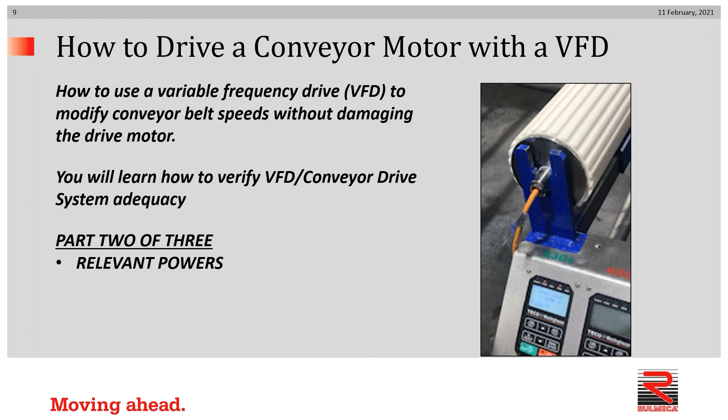Here are some facts that you should know. If an AC squirrel cage induction motor is used as a conveyor drive, be aware that it is optimized to run at a certain power supply and carry a certain full load amp rating. That will be on the data plate, FLA. It has no inherent ability to protect itself from current overload, and that's why external overcurrent protection is necessary when using three-phase motors, not only on conveyors, but in any instance.

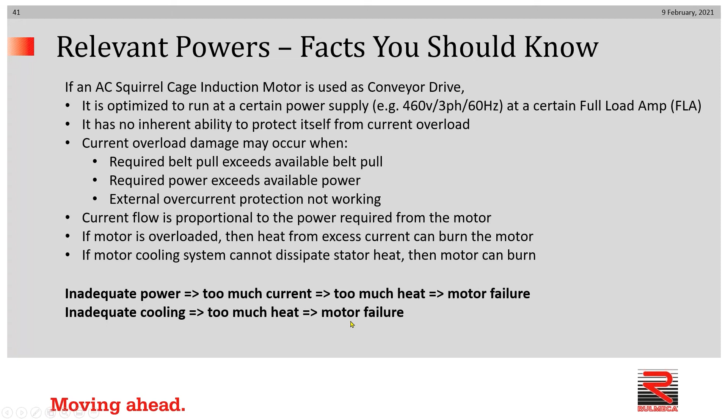Current overload damage may occur when required belt pull exceeds available belt pull, or when required power exceeds available power, and of course when external overcurrent protection is not working. The system will self-destruct. Current flow is proportional to the power required from the motor, regardless of what it's designed to provide. If it's overloaded, then heat from excess current can burn the motor, generally in the stator. If the motor cooling system cannot dissipate stator heat, that also can cause the motor to burn. So in summary, inadequate power implies too much current in the stator, which implies too much heat, which implies motor failure. Likewise, inadequate cooling would imply too much heat, and that implies motor failure. Both of these things need to be avoided.

Now let's discuss relevant powers and heat dissipation. Power is the rate of doing work, or the amount of energy transferred per unit time. Electric power is converted into mechanical power when an electric motor is used to drive a conveyor belt, and heat is a natural byproduct. Required mechanical power is generally calculated in foot-pounds per minute and expressed as so many horsepower.

A standard electric power supply is defined as the supply which is readily available and installed to power the drive system. The installed electric motor power, expressed in horsepower, is what is chosen to drive the conveyor belt. Available electric power supply may be constant if 460 volt 3-phase 60 hertz is used as supplied by the power company or by the generators on site, or it may vary. If a variety of frequencies are going to be used with a VFD, then available electrical power supply will vary. Likewise, is available electric motor power constant, or is it going to vary with various hertz?

Heat: motor stator heat must be continuously dissipated while the drive provides continuous full load mechanical power. Required steady-state cooling may use airflow, as in the example of a TEFC motor, a totally enclosed fan-cooled motor, very common, which is typical in an exposed drive system, or required steady-state cooling may use oil flow, as in the case of a Rulmeca motorized pulley. We'll see examples of an exposed drive system and an internally powered drive system in the coming slides.

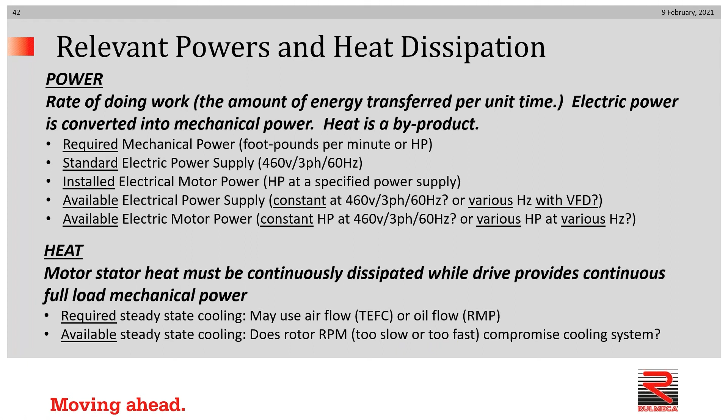Work may be defined when a constant force of magnitude F exerts itself on a point which moves a displacement of S. Work equals force times displacement, or W equals Fs. In imperial units, work is expressed in foot-pounds. If our force is 1,000 pounds, and if the point moves in a straight line a distance of 330 feet, then the work done is 1,000 pounds times 330 feet, or 330,000 foot-pounds.

Now let's define mechanical power. Power is simply the rate of doing work, or so much work per time. Mathematically, it would be expressed as follows: force times displacement divided by time, or the equation Fs divided by T. Alternatively, we can say the same thing in a different manner: power equals force times velocity, or force times S divided by T. Our example, once again: a force of 1,000 pounds exerting itself on a straight line for a displacement of S. If that takes 1 minute, then the required power will be, as you can see here, Fs divided by T, 1,000 pounds times 330 feet divided by 1 minute.

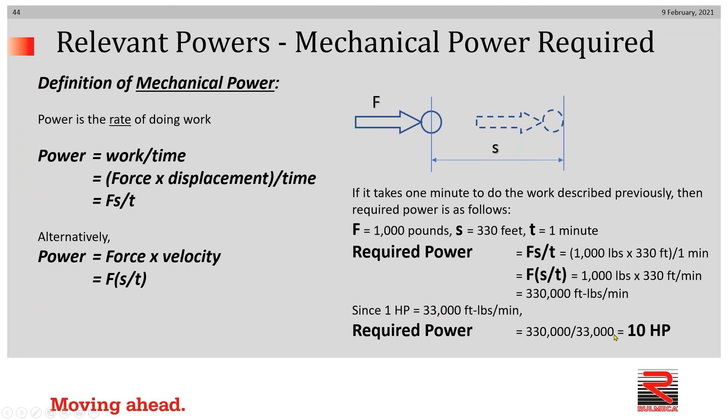Alternatively, we can say it's a force of 1,000 pounds multiplied by 330 feet per minute. Both equations give the same result, 330,000 foot-pounds per minute. Since 1 horsepower equals 33,000 foot-pounds per minute, we know that required power to do the work is 10 horsepower.

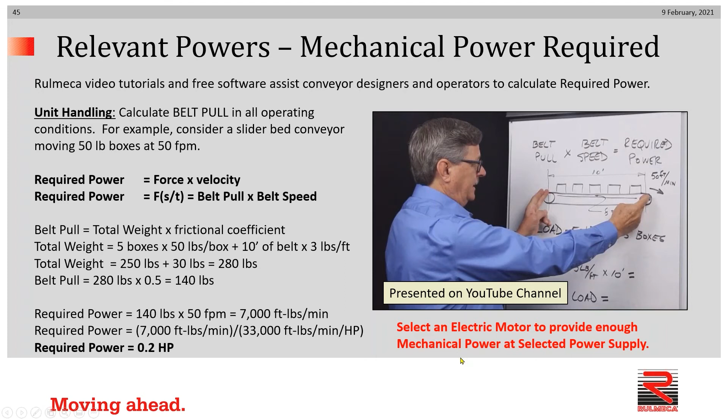Let's look at an example of a slider bed conveyor, which is horizontal, moving 50-pound boxes at 50 feet per minute. Required power equals force times velocity. If we know that the belt speed needs to be 50 feet per minute, 140 pounds times 50 feet per minute gives us 7,000 foot-pounds per minute. Dividing by 33,000, our answer comes out to be a required power of 0.2 horsepower. Now the designer can select an electric motor to provide enough mechanical power.

In bulk handling, we calculate TE, effective tension, and we need to determine the tension required to overcome friction, gravity, and momentum. As previously, we know that required power equals force times velocity, or required power equals belt pull times belt speed. Our methodology is the CEMA historical method, and you can see the equation here. We know that required power equals TE times V, or belt pull times belt speed.

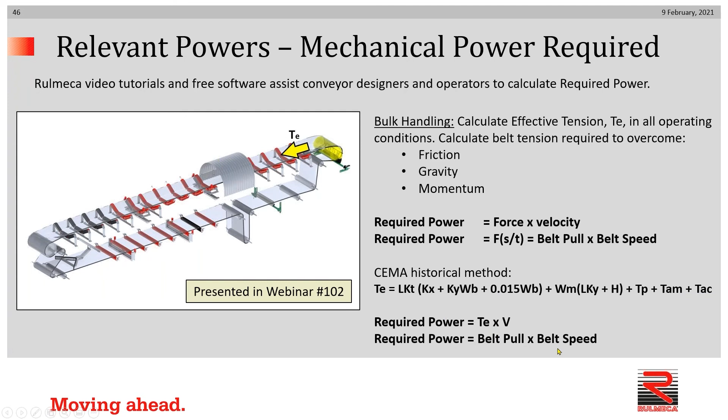Say we're going to move a certain quantity of stone at 330 feet per minute, and our calculations tell us that the belt pull, or the effective tension, is 1,000 pounds. 1,000 pounds times the selected belt speed of 330 feet per minute gives us a required power of 330,000 foot-pounds per minute. Divide by 33,000, we can see that the required power to do what I just described is 10 horsepower. Now we can select an electric motor to provide enough mechanical power at whatever power supply we choose.

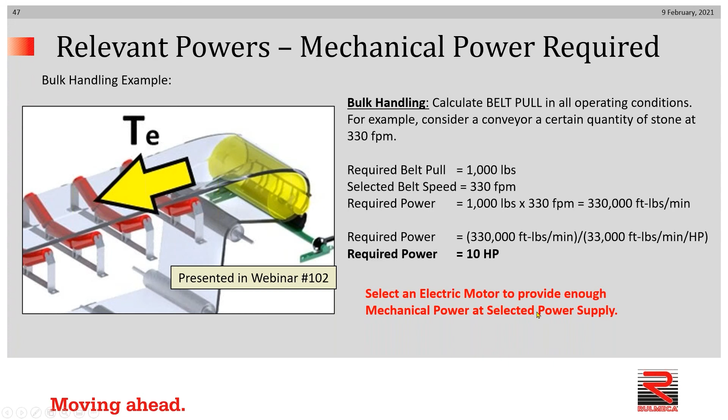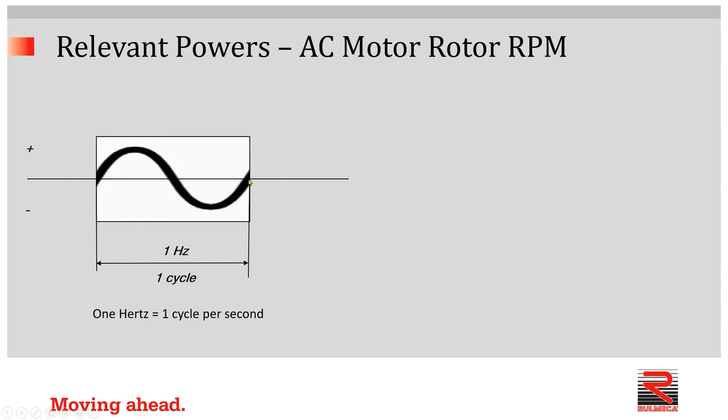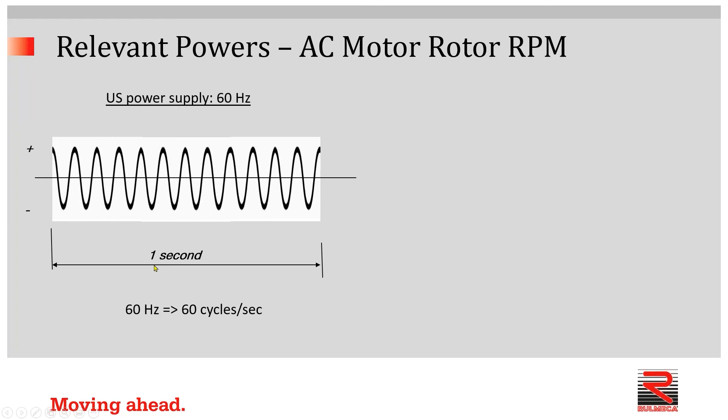Now let's look more carefully at AC motor rotor revolutions per minute, or RPM. First, we define 1 cycle. 1 hertz is the dimension that we use to describe 1 cycle, when an alternating current goes from neutral to positive, back to neutral, to negative, and back to neutral. 1 hertz is defined as 1 cycle; 1 cycle per second is 1 hertz. The typical U.S. power supply is 60 hertz. This is the way it's generated by the power plants, and so that means in 1 second, we will see 60 cycles. A 60 hertz power supply has 60 cycles of alternating current per second.

Since at 60 hertz the rotor rotates at 60 revolutions per second, the motor RPM is simply the product of these two numbers: 60 times 60 is 3,600 RPM. As I mentioned previously, we're going to ignore motor slip, which is a phenomenon that occurs when an asynchronous motor provides full load. To make the math easy, we're just going to use synchronous speeds.

Let's see what happens when we change the power supply frequency. If we reduce the frequency from 60 hertz to 30 hertz using a VFD, now as 30 hertz current flows through the stator and the magnetic flux forces the rotor to turn at 1 revolution per cycle, the rotor is only rotating at 30 revolutions per second. Therefore, the RPM becomes a product of these numbers, 30 times 60, or 1,800 RPM. Cutting the frequency in half cuts the rotor RPM in half.

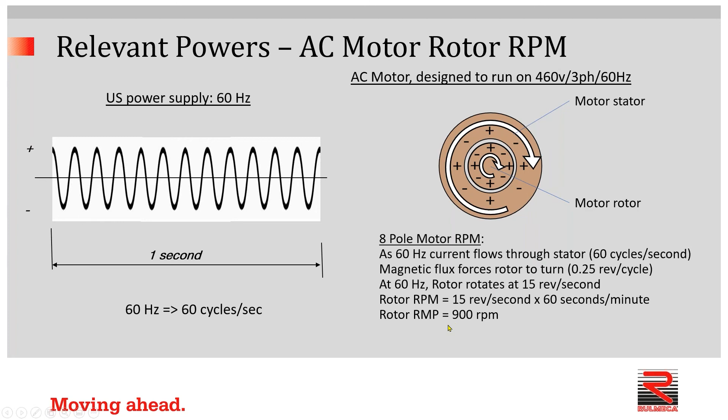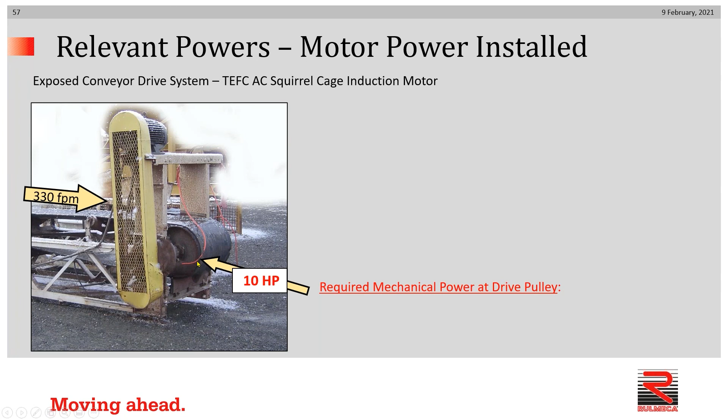Now let's look at a real-world case. Let's say we've calculated the mechanical power required at this pulley, and we want a belt speed of 330 feet per minute. We can install a TEFC motor. Let's say we're going to install 10 horsepower of electric power. Note that this exposed drive has cooling fins and a shroud enclosing the cooling fan.

If we know that the pulley has a radius of 0.5 feet, the circumference equals 2 pi r, or 3.1416. It's easy to calculate the pulley RPM simply by dividing the belt speed by the circumference. That gives us a pulley RPM of 105.04.

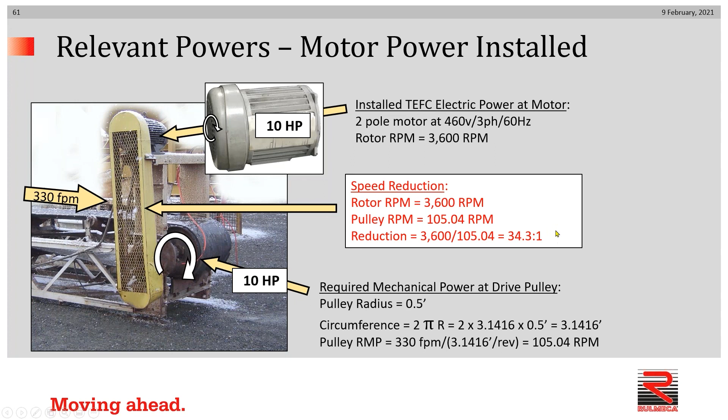If we decide to install a 2-pole motor at 460 volt, 3-phase, 60 hertz, we know from what was just displayed earlier, the motor RPM is 3,600 RPM. So to calculate the speed reduction required in this example is nothing more than dividing 3,600 by 105.04, and we need a reduction of 34.3 to 1.

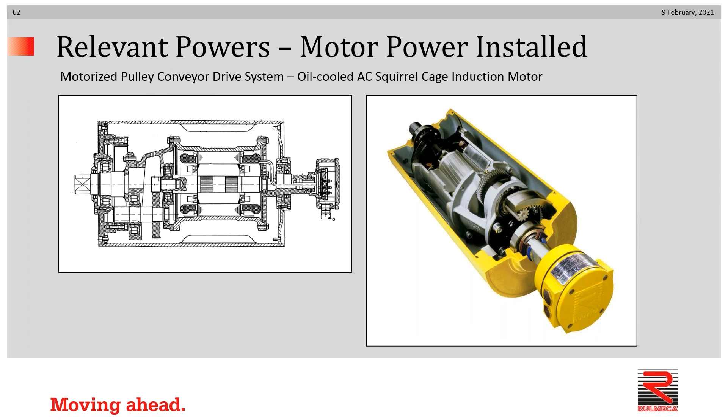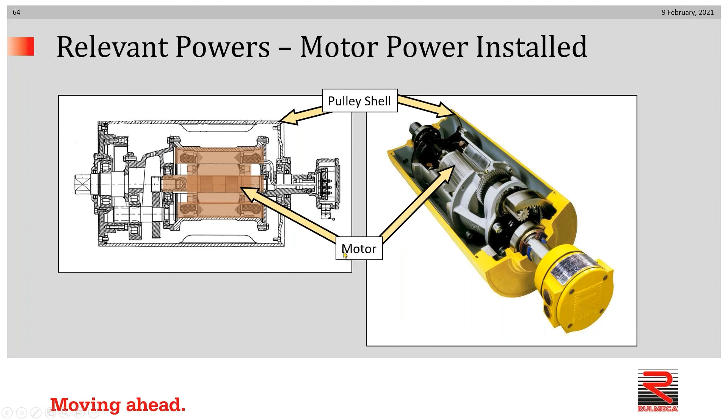Let's alternatively compare a motorized pulley drive system. Here we have an oil-cooled AC squirrel cage induction motor, but the components are virtually identical. We have a pulley shell, so let's say it's the same diameter. We have an AC squirrel cage induction motor, say it's 2-pole. We have a gearbox providing whatever ratio is needed. And very importantly, we have a certain quantity of oil to provide lubrication of all the mechanical parts and to provide the all-important cooling of the stator in steady state.

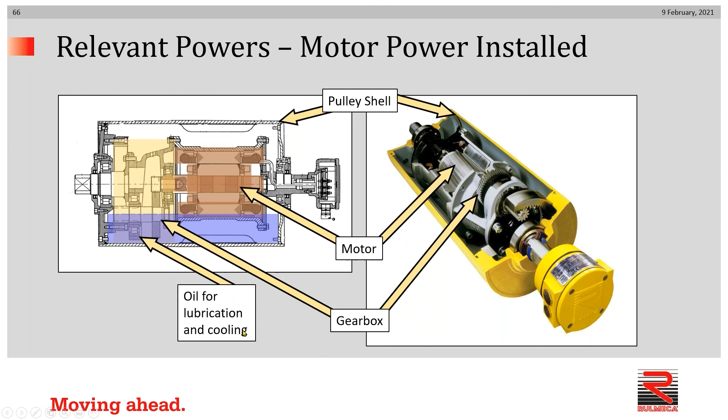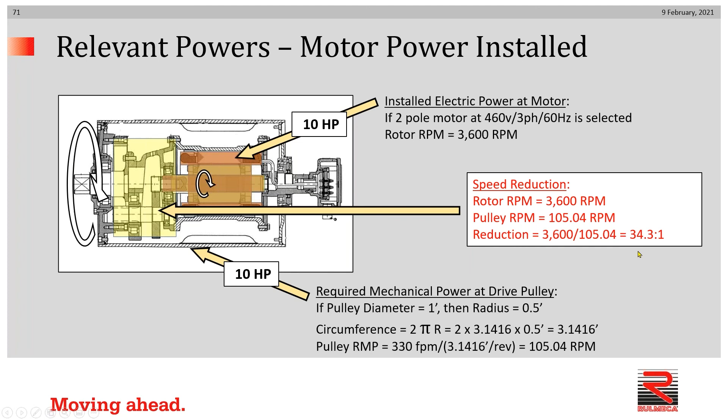So let's say we require 10 horsepower of mechanical power at the face of a pulley, and we're going to install an electric motor of 10 horsepower. If the diameter is identical to what we described previously, the RPM is the same. If we select a two-pole motor, as we did previously, the RPM is the same. Therefore, the speed reduction, as in the previous example, would be 3,600 divided by 105.04, or a speed reduction of 34.3 to 1. Now let's try to understand the relationship between required power, which is calculated as force times velocity, and installed power, which is calculated as torque times angular velocity.

As I said previously, if force equals F and velocity equals belt speed, required power is simply force times belt speed. In the example we presented previously, we calculated a mechanical requirement of 10 horsepower. Since the drive system is going to be providing power by spinning, it's important to know that torque equals force times radius, or F times the radius R.

Angular velocity is defined as revolutions per minute times radians per revolution, or RPM times 2 pi. If we know we intend to install power at the pulley of 10 horsepower, we can calculate the torque at the pulley face as follows. We know that 10 horsepower has been installed. That's 330,000 foot-pounds per minute.

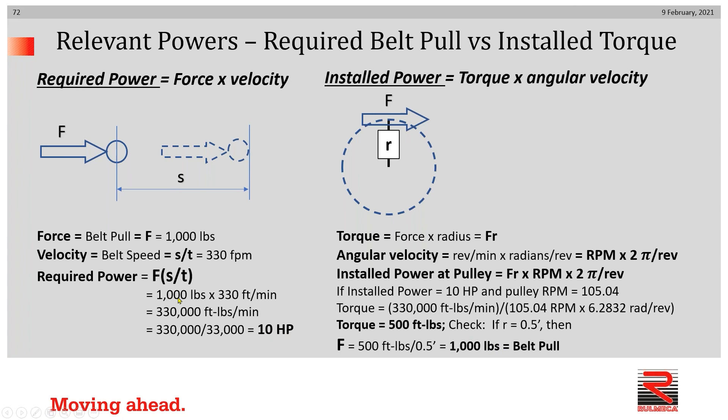We simply divide by the product of these two numbers, 105.04 times 2 pi, and the answer is 500 foot-pounds of torque. As a quick check to make sure this makes sense, since we know that torque equals force times radius, and we know the radius is 0.5 feet, 500 foot-pounds divided by 0.5 feet tells us that we have a belt pull of 1,000 pounds. 1,000 pounds of belt pull is provided, 1,000 pounds of belt pull is needed.

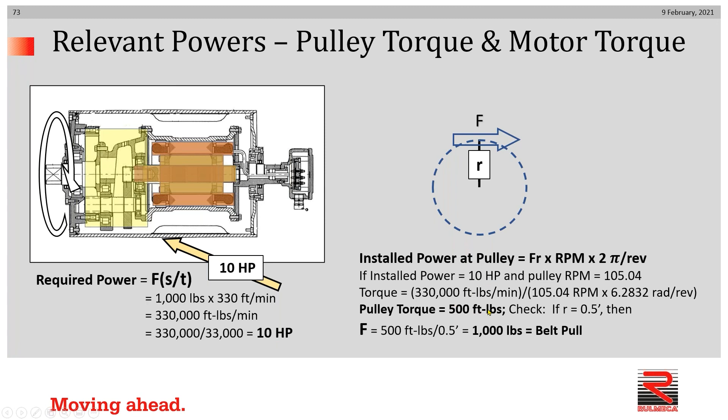Let's have a look at a motorized pulley. If required power at the pulley face is 10 horsepower, and installed power is 10 horsepower, pulley torque is 500 foot-pounds, and belt pull is 1,000 pounds. Let's see what is installed by having a look at the two-pole motor shaft.

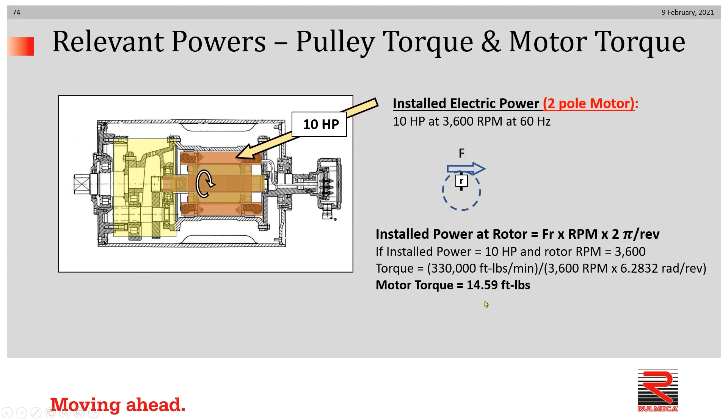10 horsepower at 3,600 RPM at 60 Hertz tells us that the installed power at the rotor is FR times RPM times 2 pi. We divide 330,000 foot-pounds per minute by the product of 3,600 RPM and 2 pi, and that tells us that the motor torque is 14.59 foot-pounds. So 14.59 foot-pounds of torque at the motor gives us 500 foot-pounds of torque at the pulley face.

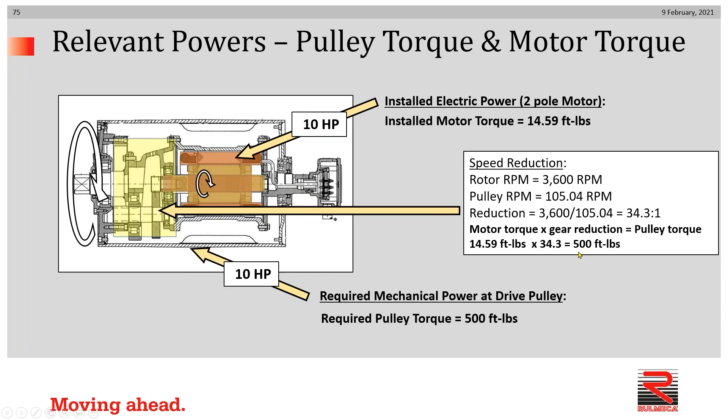We said that we need a gear reduction of 34.3 to 1. If we multiply the motor torque of 14.59 by that gear reduction ratio, the answer, as you can see, is 500 foot-pounds.

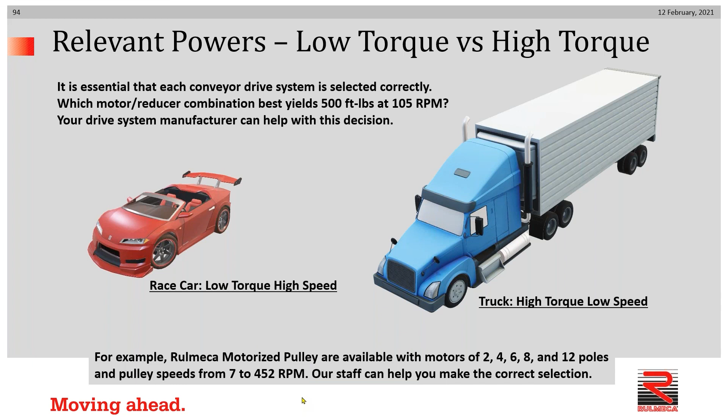That concludes part 2 of how to drive a conveyor motor with a VFD. We learned why a knowledge of relevant powers is important. We hope you found this short tutorial useful.